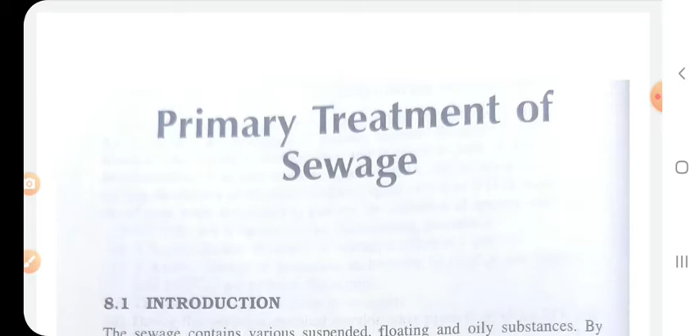By primary treatment, these substances are removed from the sewage so that the working of the sedimentary treatment units may be easy and there is no disturbance in the operation of those units.

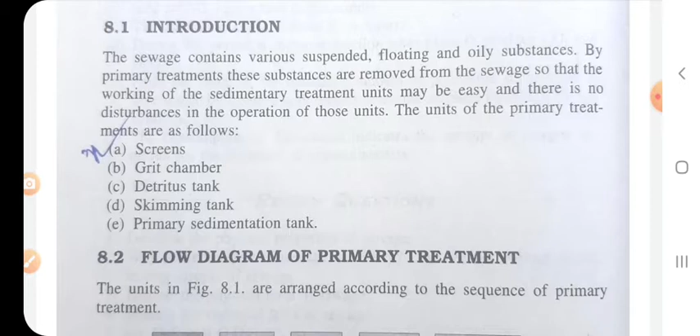The units of primary treatment are as follows: screen, grit chamber, detritus tank, skimming tank, and primary sedimentation tank. 5 numbers. Okay, screen.

First, the flow diagram of primary treatment. Very important, the diagram is very important. See the diagram attentively.

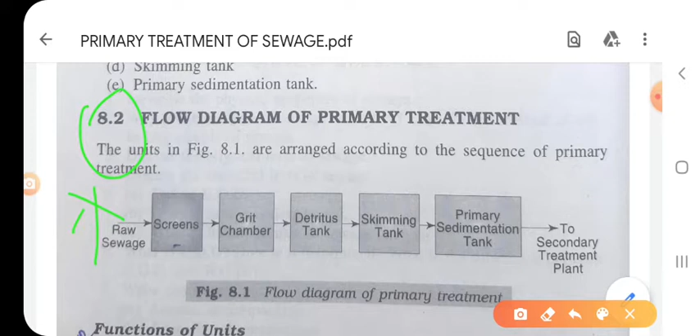Raw sewage coming from our kitchen or bathroom - that is raw sewage.

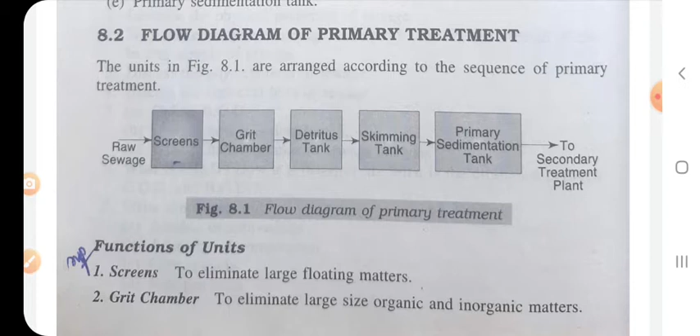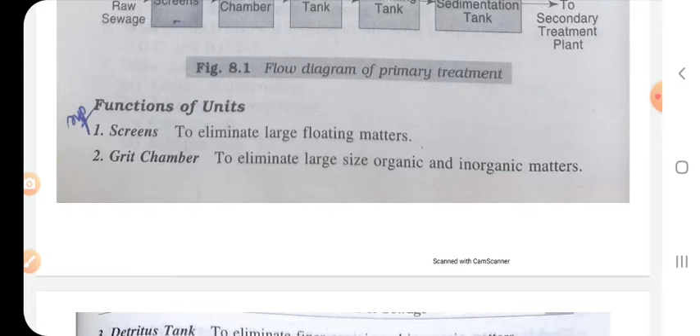Function of units: screen eliminates large floating matter. Next is grit chamber, to eliminate large size organic and inorganic matter.

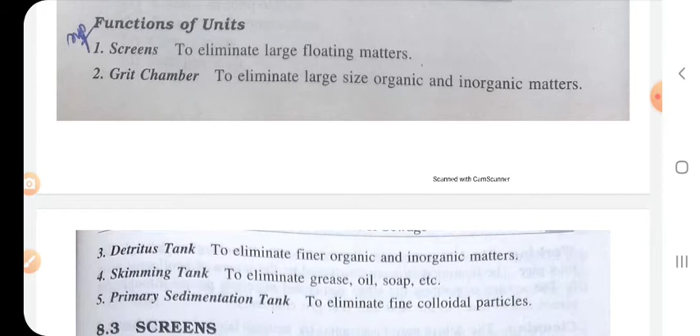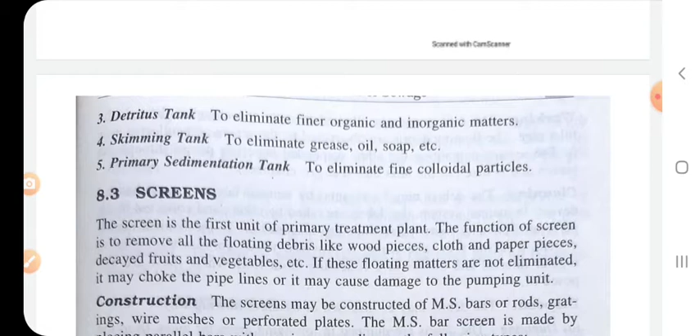Next is detritus tank, to eliminate finer organic and inorganic matter. So: screen eliminates large floating matter; grit chamber eliminates large size organic and inorganic matter; detritus tank eliminates finer organic and inorganic matter; skimming tank eliminates grease, oil, soap, etc.; and number 5, primary sedimentation tank eliminates fine colloidal particles.

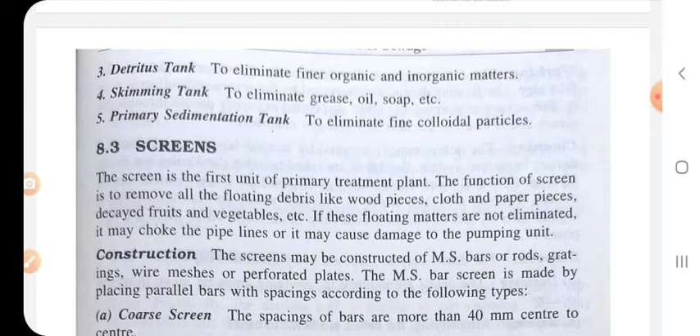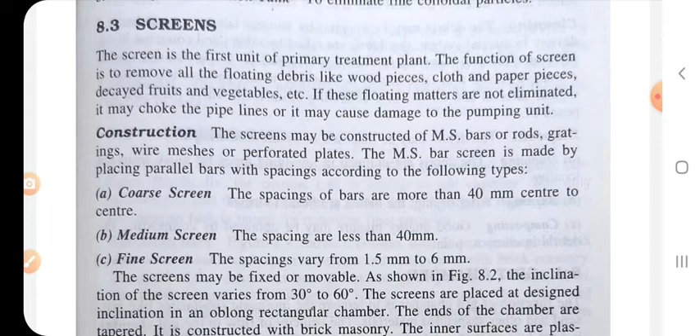First is screen. The screen is the first unit of the primary treatment plant. The function of the screen is to remove all floating debris like wood pieces, cloth, paper pieces, fruits, vegetables, etc.

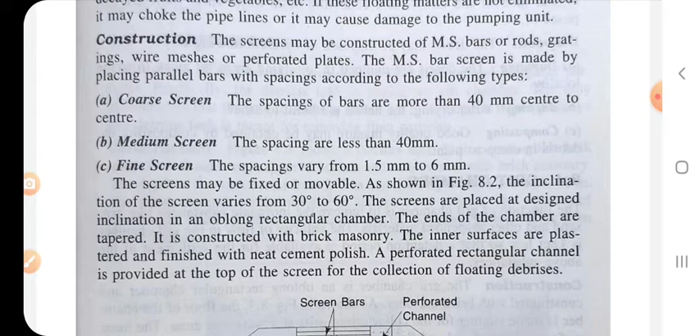Coarse screens are 40mm center to center, and medium screens less than 40mm. 40 to 60mm, or greater than 40mm for coarse; medium is less than 40mm, mind it.

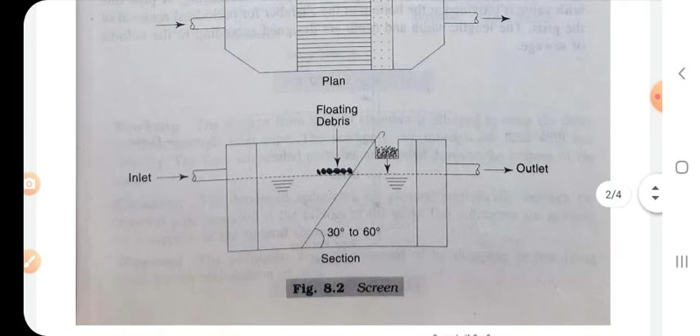Fine screen, the spacing varies 1.5 to 6mm. This is the screen situated - see the picture attentively.

Working: cleaning, disposal, dumping, burning, and composting. Next is grit chamber. The function of grit chamber is to remove

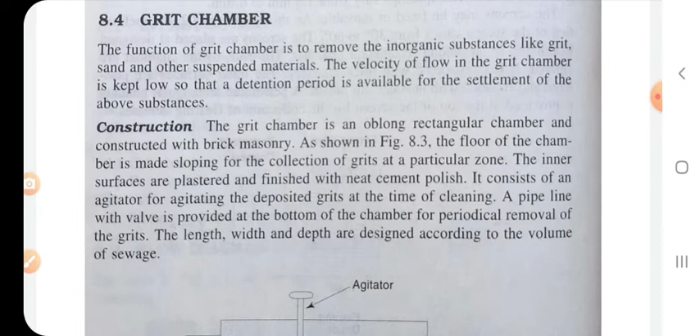the inorganic substance like grit, sand, and other suspended material. Velocity of the flow in the grit chamber is kept low so that a detention period is available for the settlement of the above substance. Construction: how it is constructed.

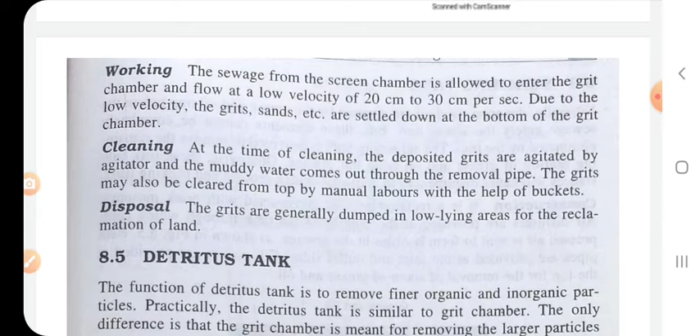Working: the sewage from the screen chamber is allowed to enter the grit chamber and flows at a low velocity of 20 cm to 30 cm per second. Very important.

Cleaning and disposal. Detritus tank: the function of the detritus tank is to remove finer organic and inorganic particles.

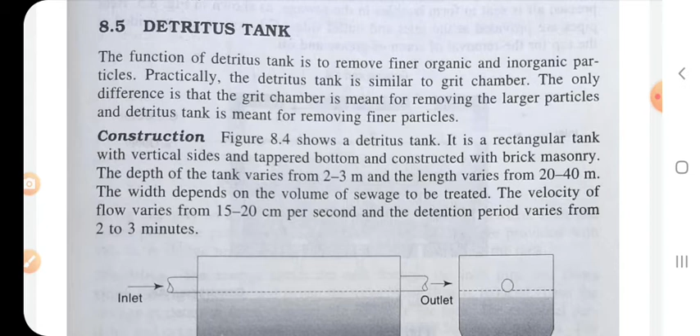Practically, the detritus tank is similar to the grit chamber, just like a grit chamber. The grit chamber's function and the detritus tank's function are the same. The only difference is the grit chamber is meant for removing the larger particles and the detritus tank is meant for removing finer particles. Construction:

This is the detritus tank. See, this is the cross section.

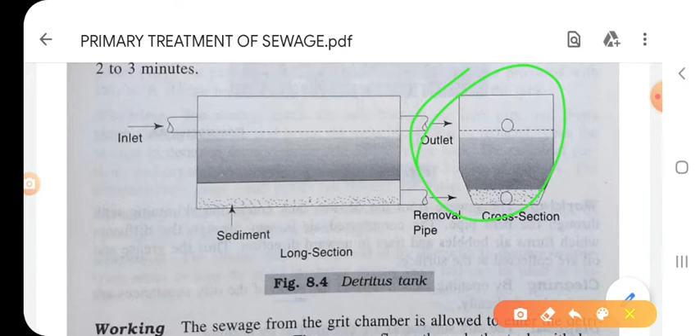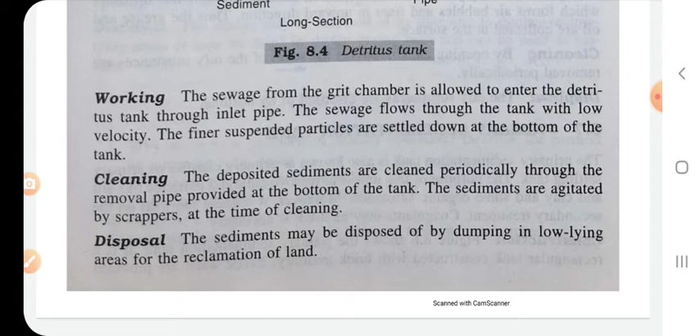Working: the sewage from the grit chamber is allowed to enter the detritus tank through the inlet pipe. The sewage flows through the tank with low velocity. The finer suspended particles settle down at the bottom of the tank. This is the detritus tank.